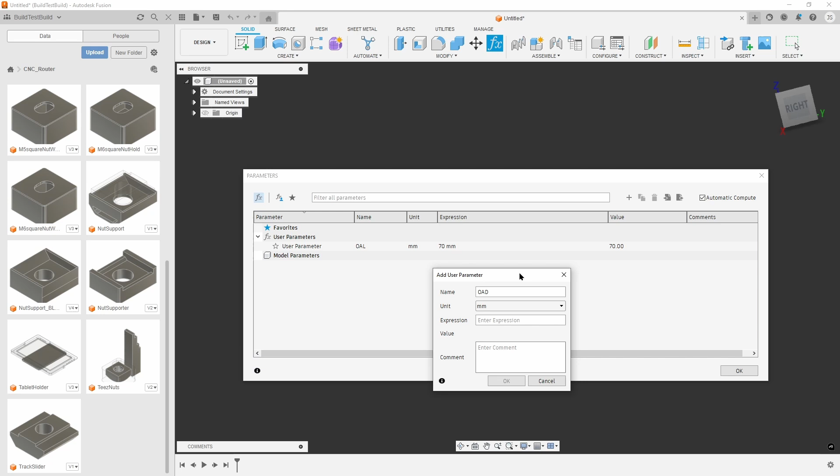So before designing this part, what I really like to do is I took out a piece of paper and a pencil, and I sketched out the whole part, the whole design. I measured the whole part, and got all that down on the piece of paper, made sure it made sense, and that was my starting sketch, which I'm going to copy all those numbers off of in order to fill out this whole parametric document. So I'm just copying off that list and getting part by part each variable down and filled in.

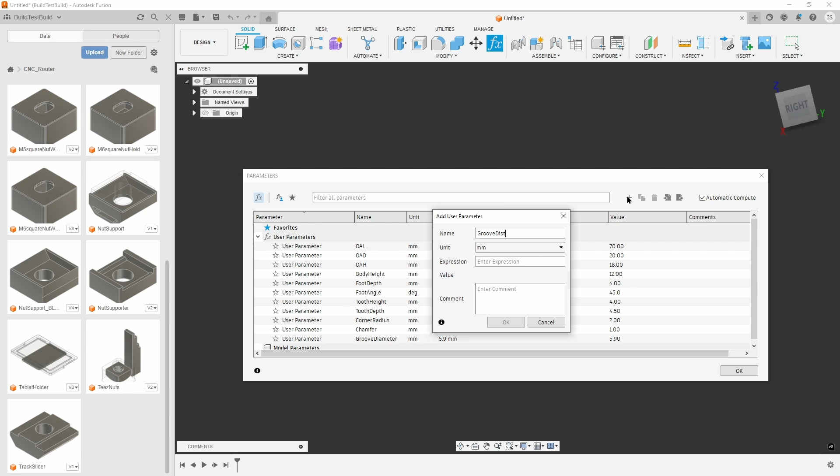Now, one of the interesting ones, of course, is yes, you can do your units as millimeters, but also degrees. And so make sure that your units are correct, and you can mix and match. You can do inches and millimeters in the same design. And I'm just going to take advantage of the snipping tool to take a copy of that so I remember what the names are, because somewhere in the middle of my design, I'll forget what I named something.

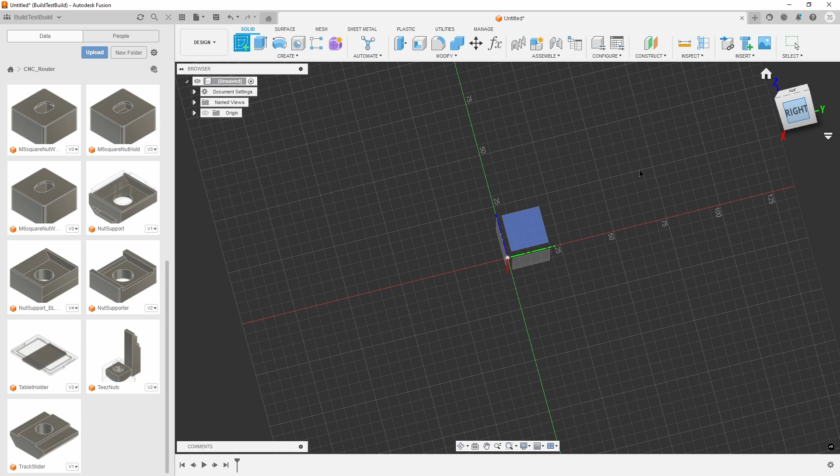So moving on. The next thing that matters is figuring out how you want to orient your part so that either it works in an assembly, or in this case, when you download this file and go to drop it on your build plate, it's going to start in the orientation towards the build plate that I want it to, right? And initially I was going to make it go to the left here, but my sketch is to the right, so we're just going to scrap that and do the sketch to the right.

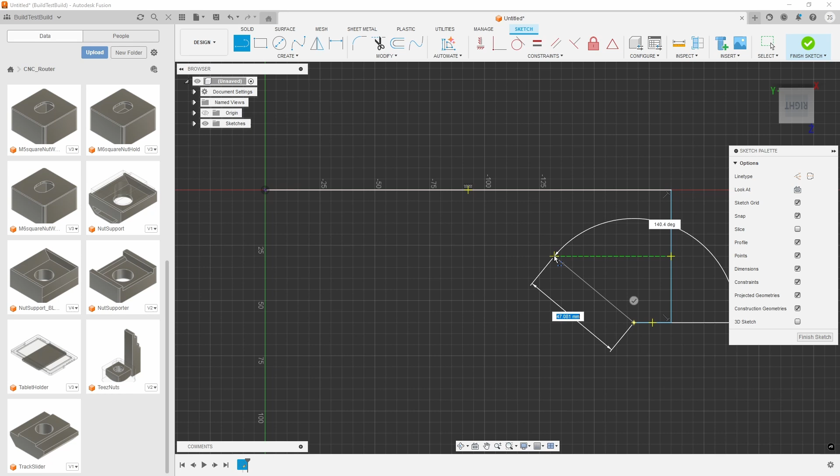So I'm just laying out the rough shape. I'm not worried about sizes yet. We're going to dimension it here in a second, but I'm just laying out the rough shape for it. And this is roughly the shape of my clip, and we'll start by dimensioning it and then typing in the variable name, and it will show f of x, as you see there, and then the actual real dimension, which is a good way of knowing that that is a parameter, and that is what that parameter is evaluating to.

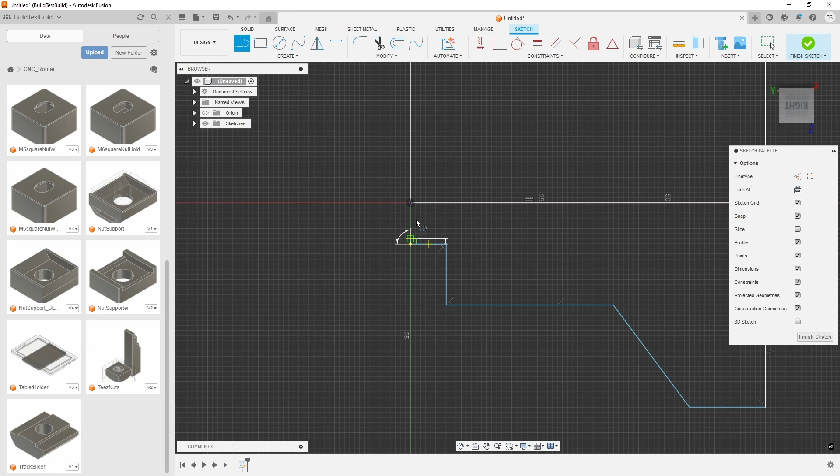So we're just going to pull this thing in and make it roughly the correct shape. Fill up this little gap in the front. Now it's turned blue. We know that it is a closed shape, so that can be extruded and turned into a solid part. And all I'm doing is going through here, dropping the dimensioning tool, typing in the variable name, using my snipping tool cheat sheet to remind myself when I forget, and then just clicking what it's dimensioning across.

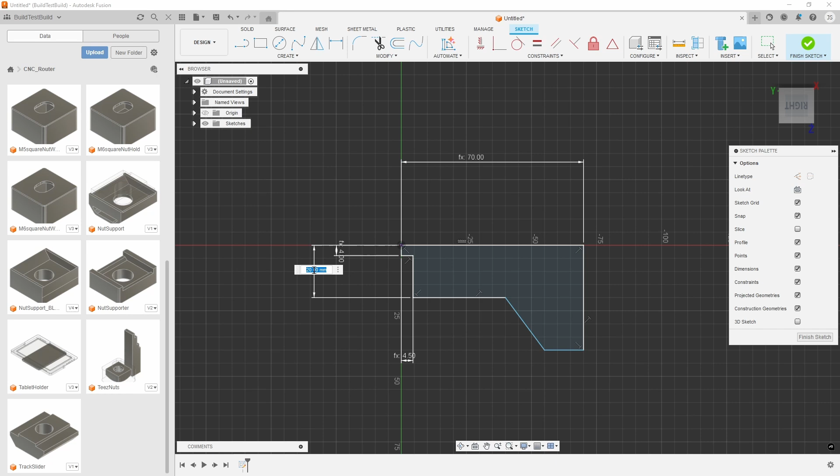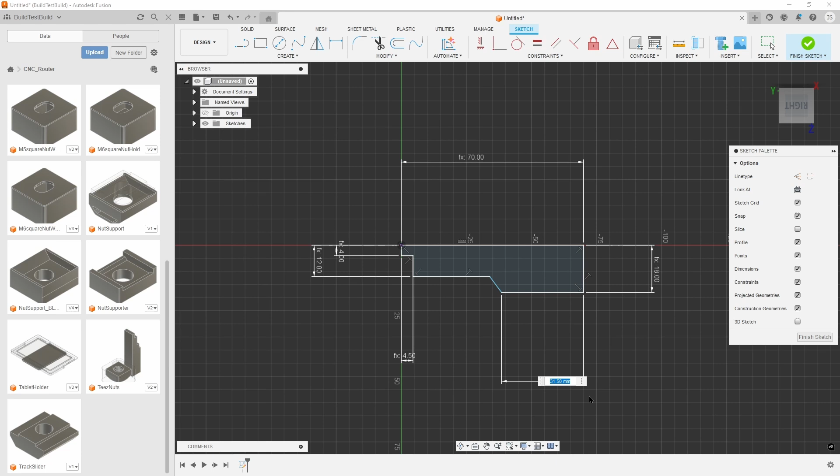As you dimension these in, you'll see that they go from blue to white to show you that they're constrained. Some of them have constraints for when I drop them in that are horizontal or vertical. And so you have horizontal or vertical, you have the starting point, and then you have the length of that segment, and then that leads to a fully constrained part. And there's just a couple parts here that are missing constraints. I've got that little foot, and then this thing needs an angle. And all of those are variable names that I've already written in.

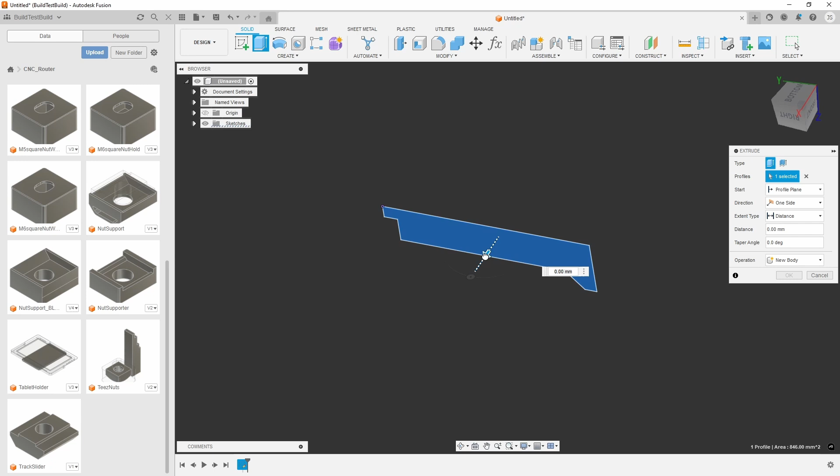So all the variables look good. We're going to go ahead and finish the sketch. Now we're going to click on that closed space, and we're going to pull it out. And I want to do something different here because I'd like the center line to be the center plane. But the problem is that my dimension is the total depth. So what I'm going to do is just use the total depth divided by 2, and then the symmetric thing will make it all work out correctly.

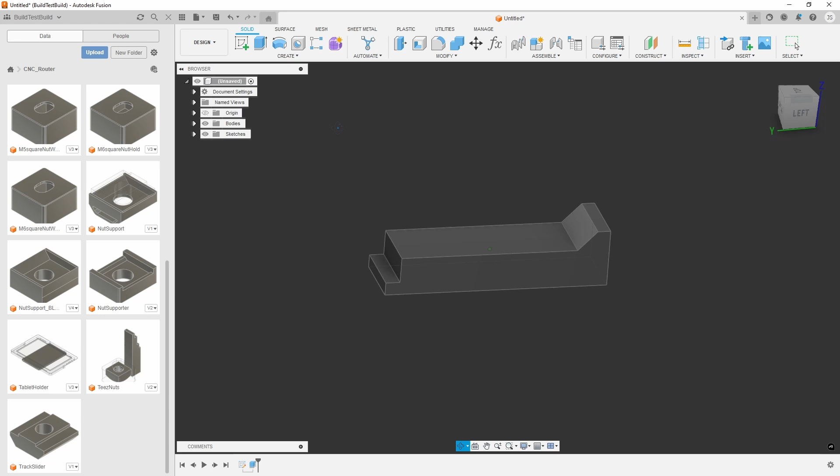So I like to take some time in between steps to just carefully look over the part, make sure it all makes sense. I'm just thinking through how it looks, and I'm thinking about adding the fillets on the corners here. But generally that's best to do last. So I decided not to do that. We're just going to scrap that and go ahead and place the cutout on the top of the part.

So first thing I'm doing is creating a center line. I click the line, click X. That makes it a construction line so that it won't try to extrude later. We're going to set these two equal to each other, and then we're going to connect them with some geometry. We need to make sure that that's done properly and that all of the points are tied up.

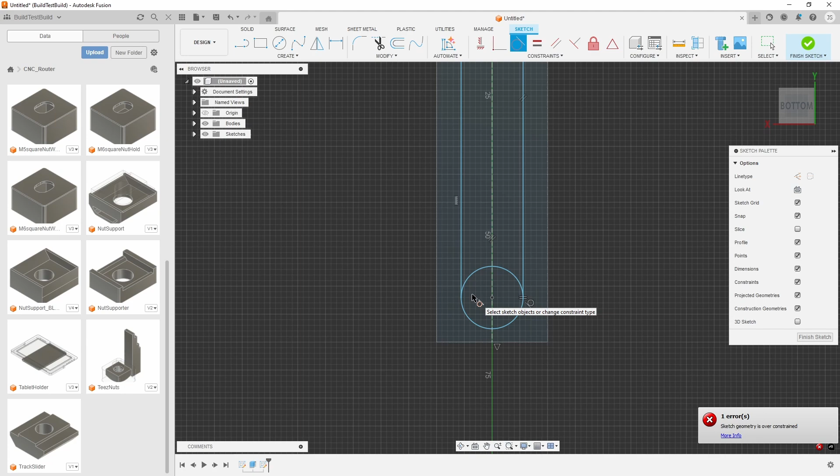So first thing we're going to do is make sure that it's tangent, so that the line is on the outer edge of the circle. So every one of these is tangent. And the bottom left one's not showing that it's tangent because that's an implied, I guess, constraint. So it would be redundant. But just to be sure, I'm just grabbing it and moving it around, which is a good thing to do. If you're not sure that things are properly attached, grab and wiggle your part, and if things are not attached, it'll be obvious really quickly.

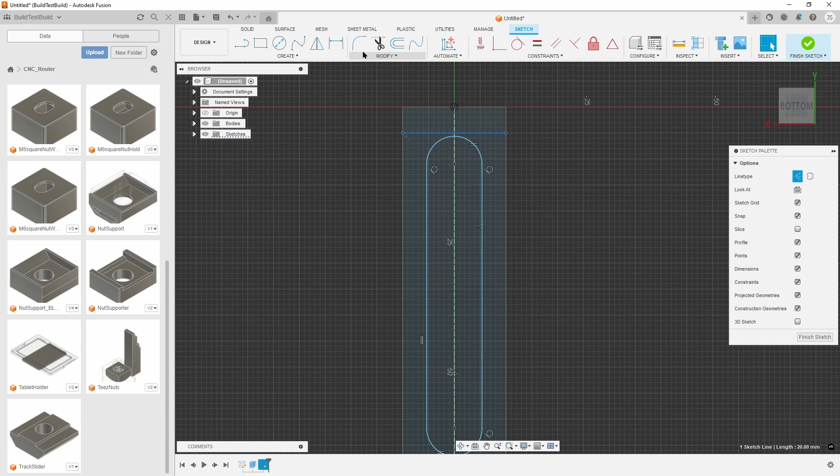So I'm going to clip out these inner elements, because what we want is an overall kind of an oval shape. When you dimension off of a curve, normally it takes the center radius, and I don't want to do that. So what I'm going to do is add this line here and apply it tangentially to that curve, right? And I've made it a construction line by clicking on it, hitting X, and that now allows me to grab that line and dimension that to where I want.

And so that's the dimension that I actually want to grab. I don't want to also subtract out the radius of that part, which you can. You can go into the parameters and you can make functions inside the parameters. Just for the sake of simplicity though, I'm doing it this way.

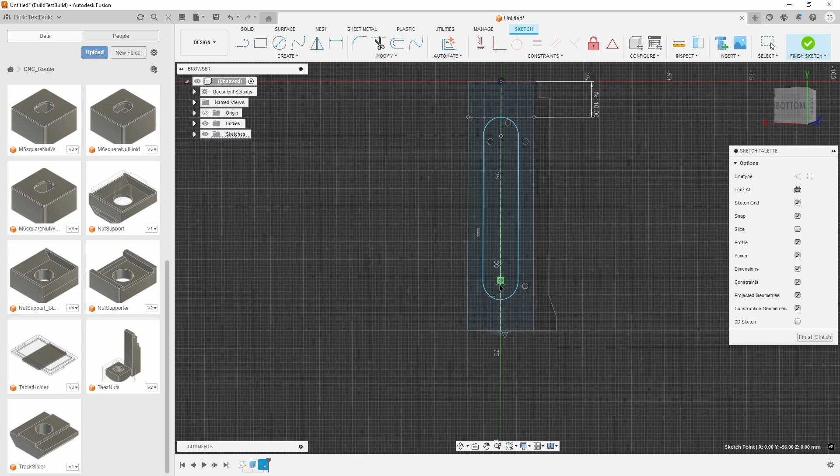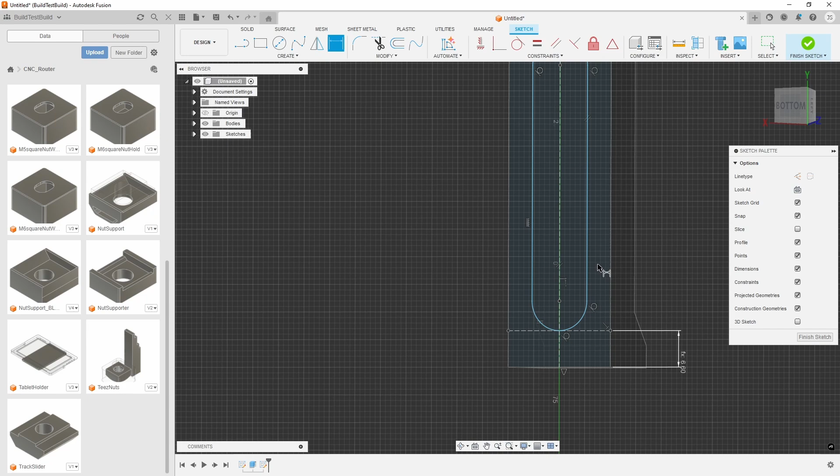And I'm just doing the same thing over here, setting up another line, setting it tangent, making it a construction line, and then I can use that line to measure off the edge and set that equal to my variable that I've already set up. So there we have our dimensions. The one that we're missing, though, is this groove diameter. So we'll select the groove diameter,

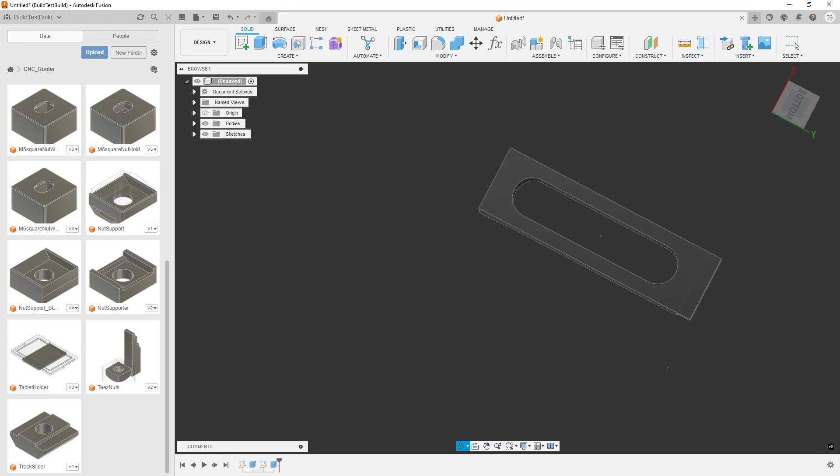and there's our sketch. And then we're going to grab the extrude. Because that is a dotted line, it doesn't interfere with the extrude. Otherwise, you might have to click multiple places to get the whole feature. But because it was a construction line, construction lines don't interfere with those. So now we have this groove, which looks oddly large, but we'll come back to that later.

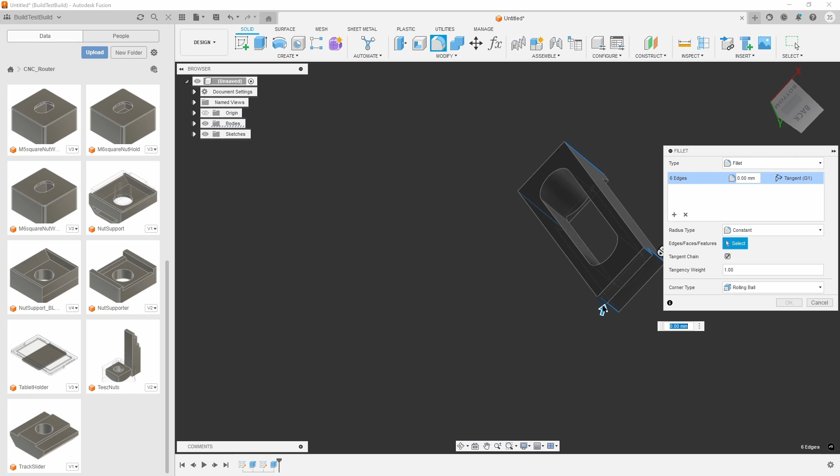In the meantime, though, we'll go ahead with the fillet and do the corners. And we do have a variable for that as well. So we're going to select all the corners that we want and then type in our variable. And it's always a good idea to grab your part, look around, and make sure you didn't miss anything, because that happens.

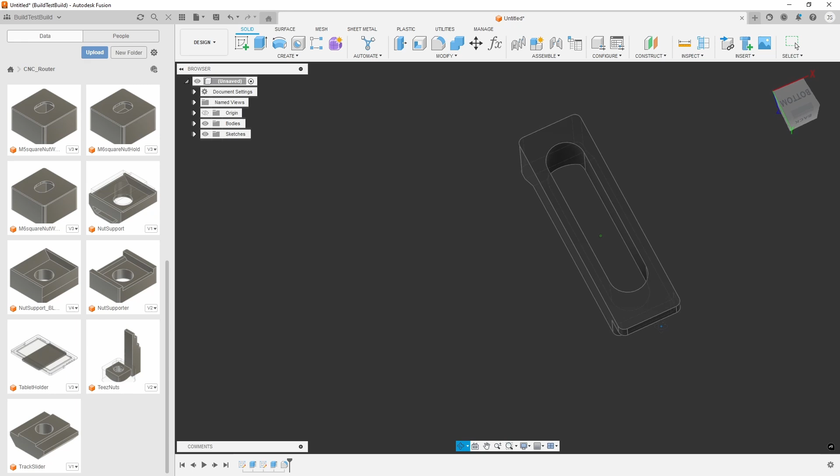So everything's in there. I'm just going to go up in here and change this to my function. And that means I don't have to go back into that feature to make changes. I can just go into the parameters section and change that parameter. So now we have our curves, and this doesn't look right, and here's the answer. It says radius, right? So what we're going to do is type that divided by 2. So we're putting in the diameter divided by 2, and it's seeing that as the radius.

Now we have the feature behaving in the way that we expected it to, the way we wanted to. So no wonder why that looked a little funny and large at the time. So, going back into the parameter section, we can select any parameter that we want and just make a change, and it cascades into the part. That's what a fully parametric part is.

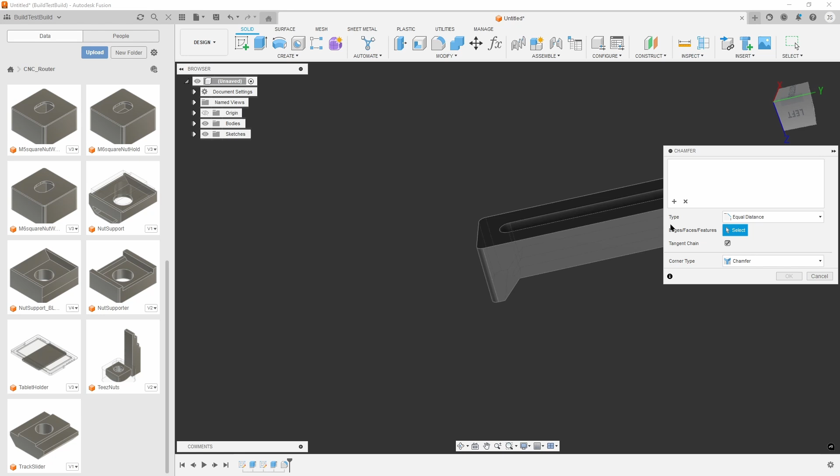And the beauty of this is when you download this file, if you download the native Fusion file, you don't even have to do a remix. You just import the Fusion file, you pull up parameters, you change the number that you want, and you can redesign this part to have a longer clamp radius or be taller or take a larger or smaller bolt. Whatever it is that you want to do for your specific design.

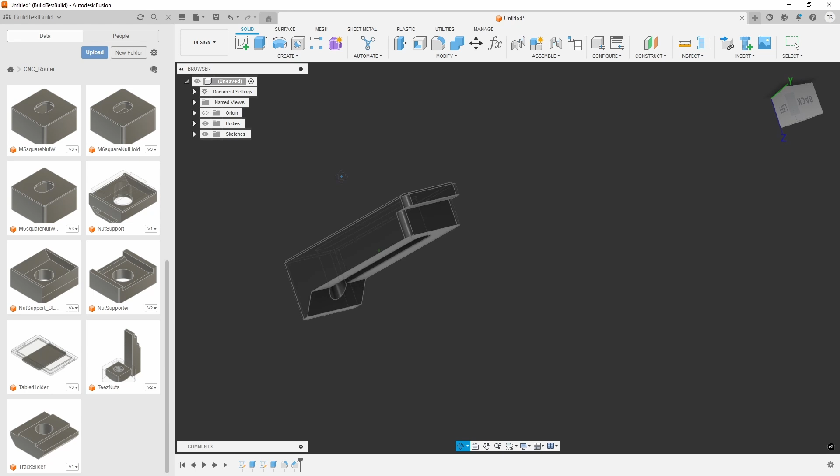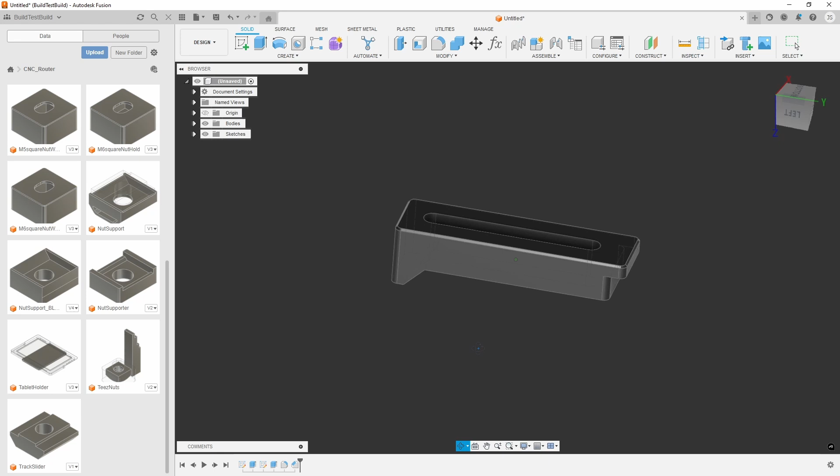This is one step beyond showing you how to do remixes. This is making a part that is basically ready to remix. All you have to do is type in numbers. So that's really cool. And so if you're designing parts and putting them up there, especially parts like this that make sense that people would want to modify them, help everybody out, and don't just place the step file, which is way better than the STL, but also export it as a Fusion file and make it a fully parametric part so that anybody can get this part, grab onto it, change the features, and away you go.

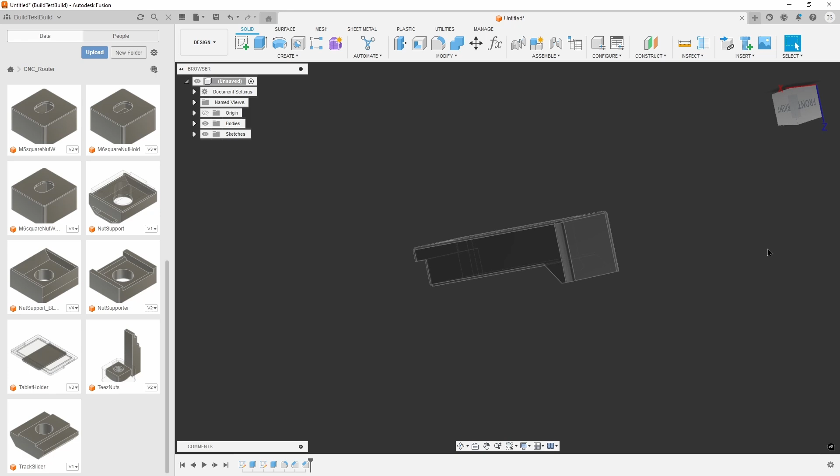I'm going to chamfer this side as well, just a little bit, just to break that edge. I'm not going to do it in the center where the bolt rides, to make sure that it gets as much clamping area as possible. And then, yeah, just playing with these dimensions. The nice thing about this is you can fiddle with it and say, maybe I want a bigger foot, and I don't like the way that looks, or this is perfect.

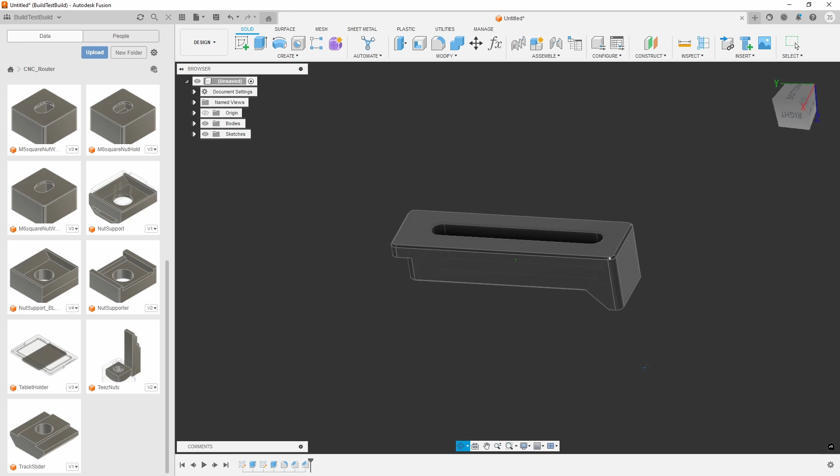So this is all it takes. You go into the parameters area, change a number, and it changes how everything looks. It's a really cool feature in pretty much all of the 3D design software that I'm aware of. But this is how you do it in Fusion. So we're just going to save off the part. Should have started with saving the part, really. So we're going to save that. We're going to export it,

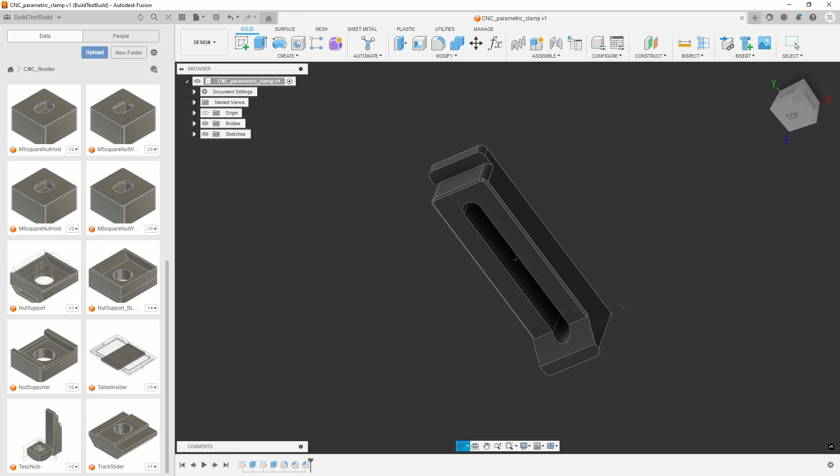and then pull it over into the slicer, and then we can get into some detail about the slicer. So one of the things that I want you to think about is that 3D printed parts have a grain direction just like wood. So wood needs to be oriented in a certain way for maximum strength. The exact same is true with 3D printed parts.

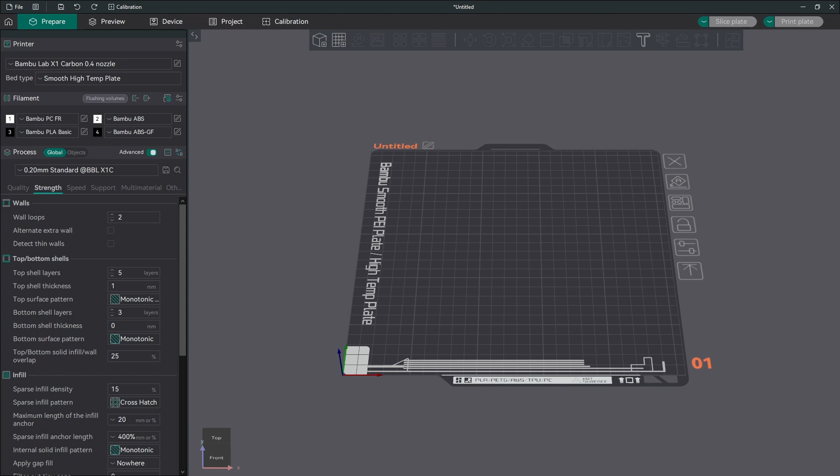And so to maximize the strength of this particular part, when I introduce it into the slicer, I'm going to introduce it on its back so that you don't have any overhangs or any parts like that, and then all of your grain is lying flat with the bed. So when this thing is laying flat on its back and it's clamped, it'll basically be in compression.

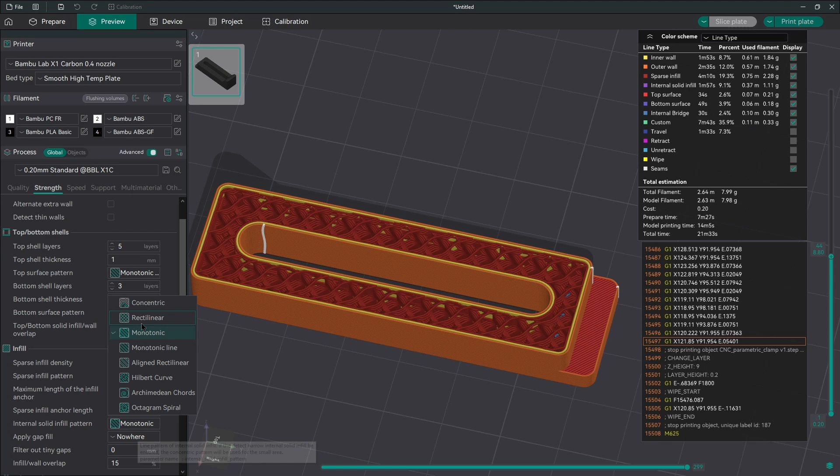Now, you can slice a part, and in order to save material, you use hollow infill like this. And for many parts, that's plenty strong. And for this part, that may be strong enough. That's something that you can play with in the slicer once you get the part in here. However, because I want this part to be as strong as possible, I'm going to make it a solid infill. But I'm not just going to quote-unquote make it solid infill.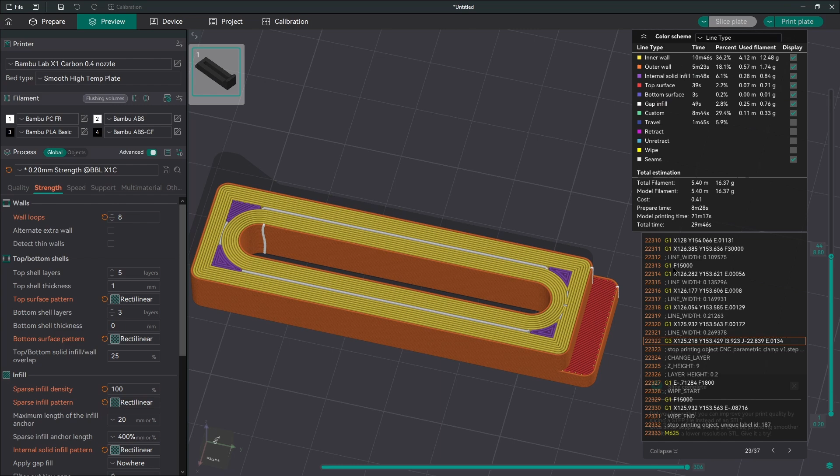I'm going to go in here, make them rectilinear. I've had certain cases where rectilinear, because it's crossing patterns, was actually stronger than a concentric all walls sort of design. So that's worth considering in certain part configurations. So we have the walls, pretty thick walls, which will give us really good support, especially on that bolt.

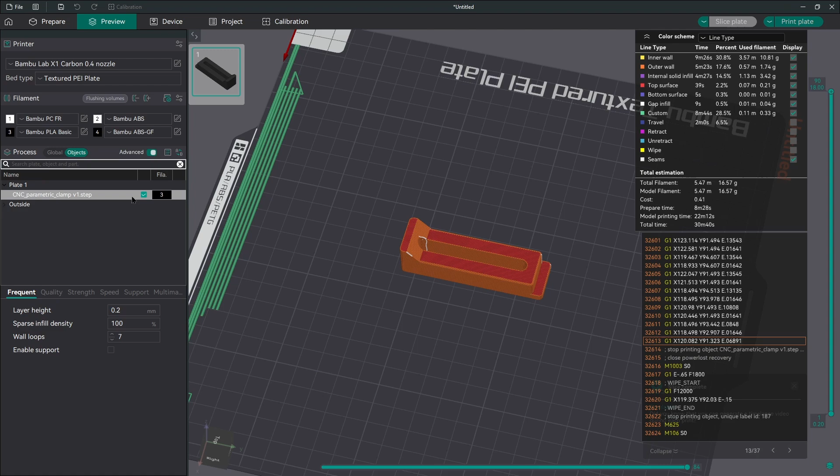And then we have a little bit of rectilinear infill so that every layer switches directions. And especially if you have a bending moment, that can make a stronger part than just regular walls. Also, material selection matters, so I would not use PETG for this kind of an in-load application.

It might be okay because this is a short-term load application, but PETG tends to bend and yield and stretch. PLA is great unless you're having heat issues, in which case you might want to look at ABS or another material.

So regardless of whether you came here for the Fusion parametric design, or you are also somebody with a CNC router table and were interested in the hold down tips, I hope that you got value out of this video and enjoyed it.

Because it's fully parametric, this design can be changed if you want to make it longer, if you want to change the hold down characteristics, if you want to change the foot, you just go in there, change the numbers in the design. You don't have to redo the design. If you want to change from an M6 to a 1/4-20 or anything else, you can change that slot size.

And these little nuts are available in 1/4-20 as well, not just M6. So look around, check your dimensions. There's definitely options there.